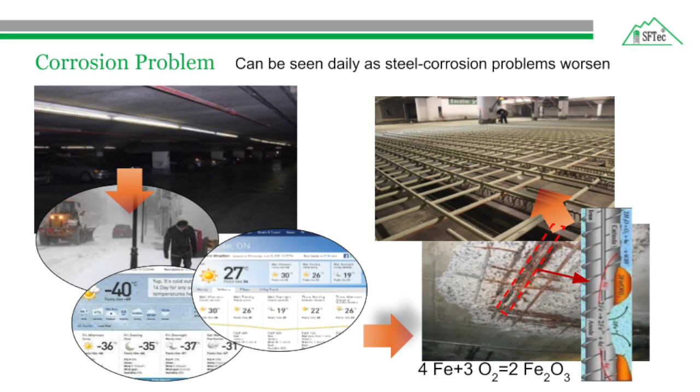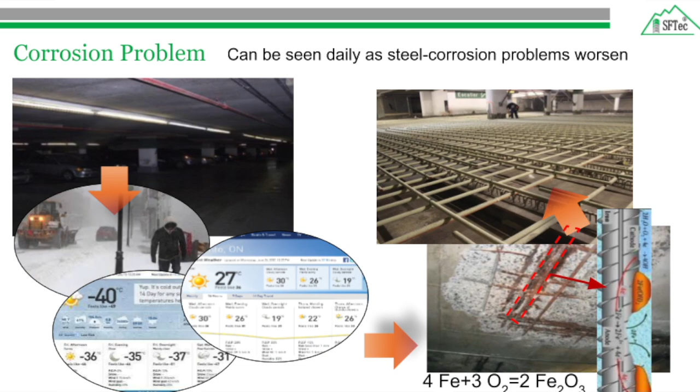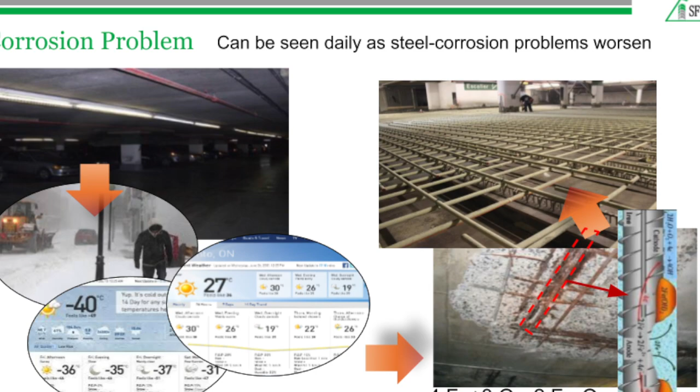In FRP also we found that the structure is able to resist after 130 minutes. So FRP bars are able to resist the heat as steel, but after 2 hours, the capacity, the member cannot be able to resist any loads more. So it is like steel. In fire, for steel, we have 2 hours, and after that, we have a complete collapse from the building. In GFRP, we have 130 minutes.

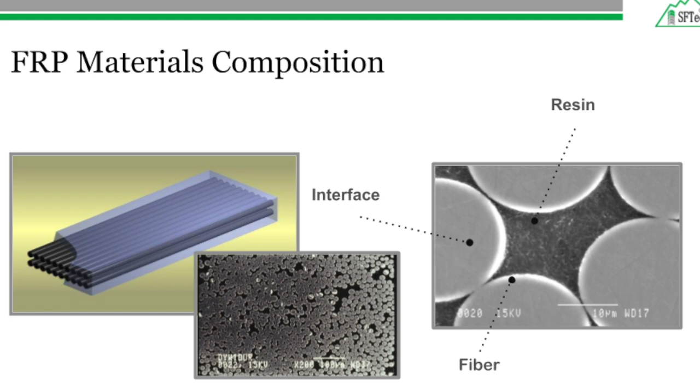We are in our company, we are producing GFRP materials, CFRP materials, and basalt FRP bars. No problem, we can produce any FRP material. But really, as I said in my presentation, we are focusing on the GFRP bars due to their cost effectiveness than other types of FRP bars.

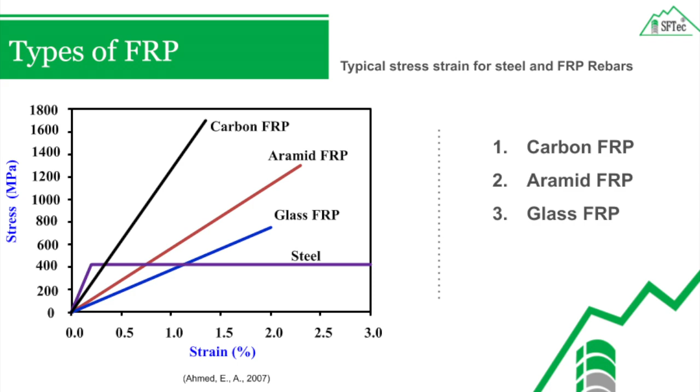And also based on the experimental work and the field application, GFRP bars as a reinforcing material showed a good performance with many applications like bridges, culverts, and ICF walls also.

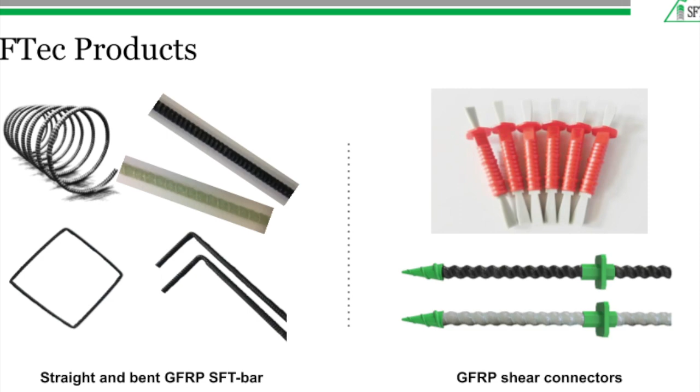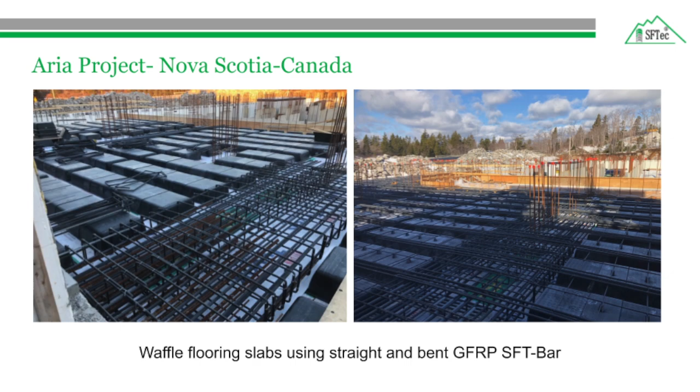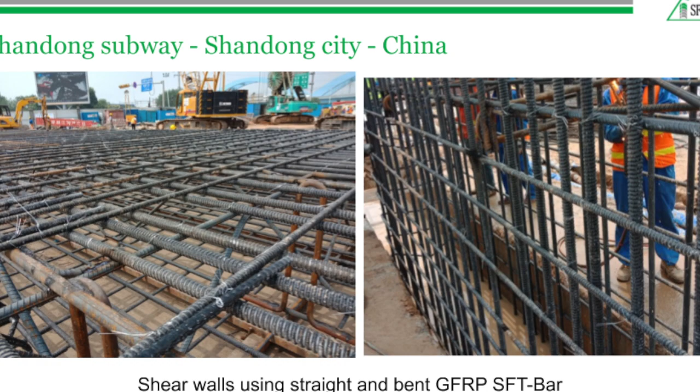The FRP bars generally cannot be bended. We cannot bend the GFRP bar, or any FRP bar, but we can give you an efficient solution to do that. If we have a straight bar like this one, and we have a straight bar like this one, if we connect them with a connector in the corner, so we cannot bend it, but we can connect it with a connector in the corner, so it will be easier for you and for the people who are working in this field to get the bar bended in many locations.

He can do this if he would like to cut these bars like 5 meters or half a meter or something like this, so it will save also in the quantity of FRP bars used in the project.

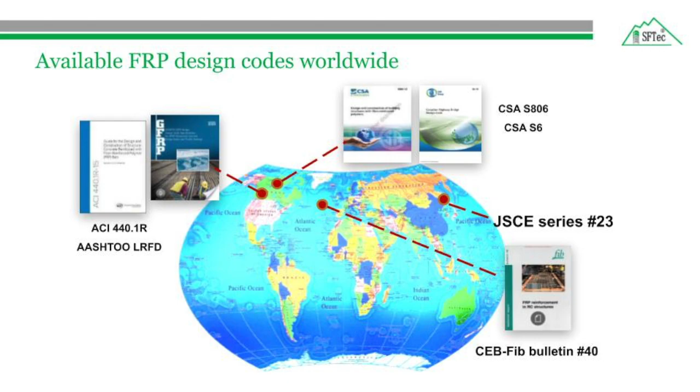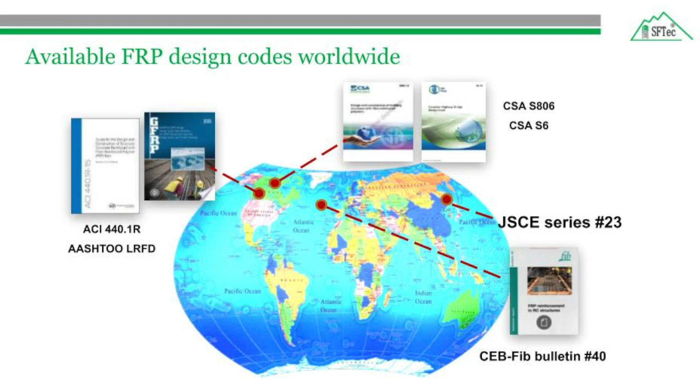For sure, yes, because for FRP bars, generally, you need to know the elastic modulus of the FRP bar. You need to know the tensile strength, and you need to know the tensile strain. So you will use this information for the design, as I mentioned in the presentation.

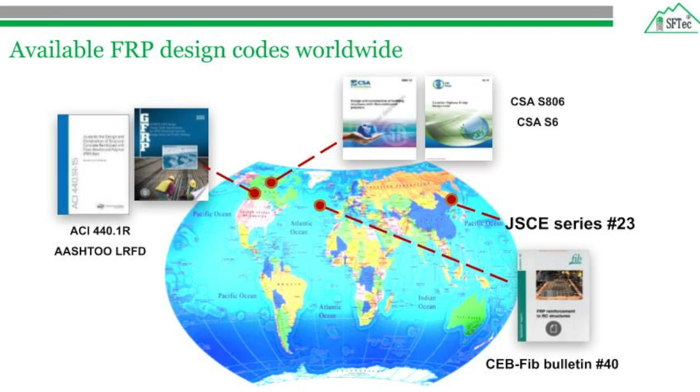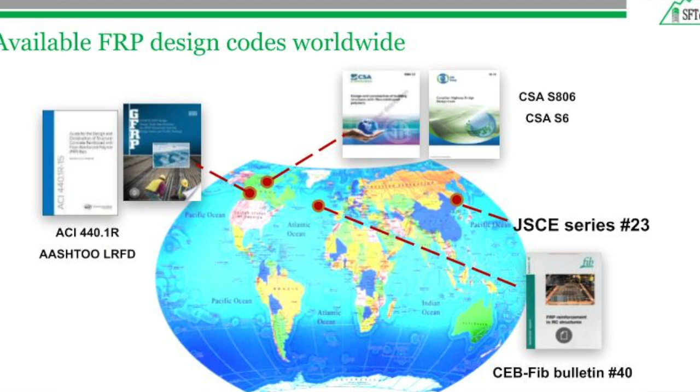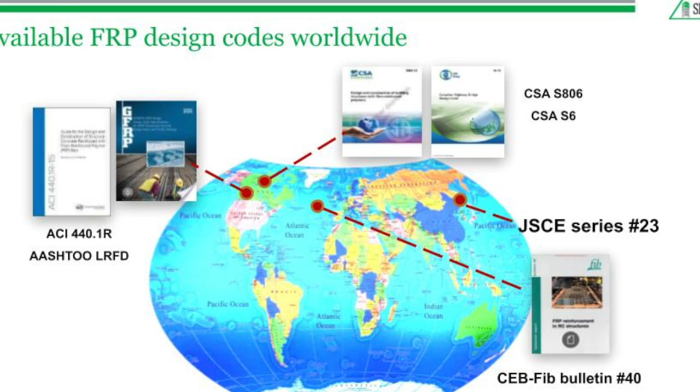So if you will replace GFRP with CFRP, it will be the same, but the calculations will give you different capacities for the design section, because the mechanical properties of the GFRP bars and the other types are different.

The design should be safe and economic, so we can't ignore the economic issue from the design. So people now are targeting the GFRP materials over the other types of FRP due to their cost effectiveness and their performance. The performance of GFRP bars is very close to the CFRP. It is not the same, but it's very close. In terms of cost, GFRP will be more economical.

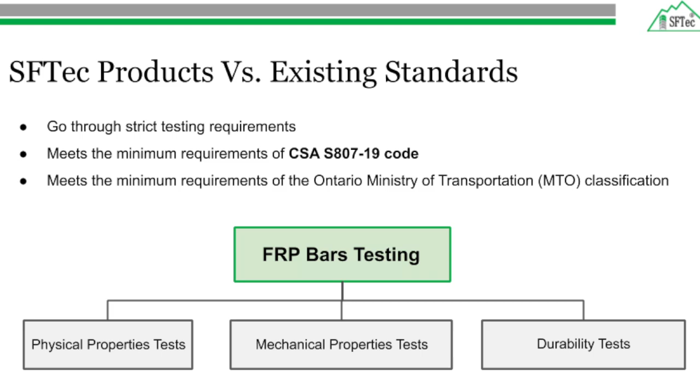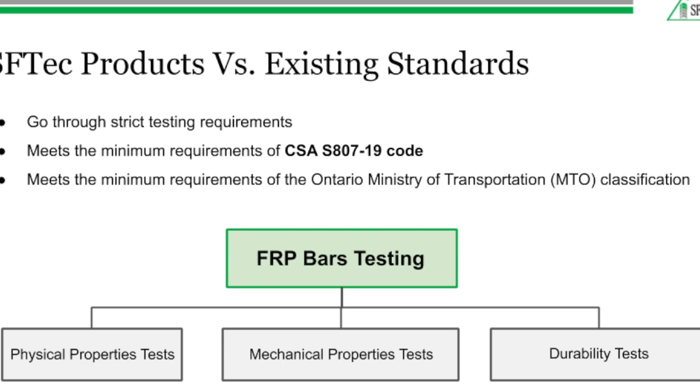In the current Canadian standard A23.3 and the American code ACI 318 for steel reinforced concrete structures, they allow using the flat plate system in the region of high seismicity as a gravity force resisting system only. So we are using the flat plate structure as a gravity force resisting system. In this case, a special moment frame or shear walls can be provided as the main seismic force resisting system.

So in seismic zones, we need to include shear walls in our building in order to resist the seismic forces. But also we need to consider that the connection between the column and the slab should have a minimum level of ductility. In FRP, we don't have a term called ductility as in steel. We have a term called deformability.

So I will give you an example. We have an experimental study for GFRP edge slab column connections under cyclic loading. Based on that, they got one connection with steel and the other with FRP, and they tested them under cyclic loading.

The GFRP connections were able to sustain like 2.5% drift ratio, which is higher than the 1.5 minimum drift ratio for steel. So by using FRP bars at the same reinforcement ratio as steel bars, you will get 2.5, more drift capacity for the connection. So you will accommodate the condition of deformability, in other words ductility, in steel codes. The GFRP connections, I mean here by connection, the connection between the slab and the column, we call it the slab column connection, is able to undergo the expected seismic drift while maintaining their gravity load carrying capacity.